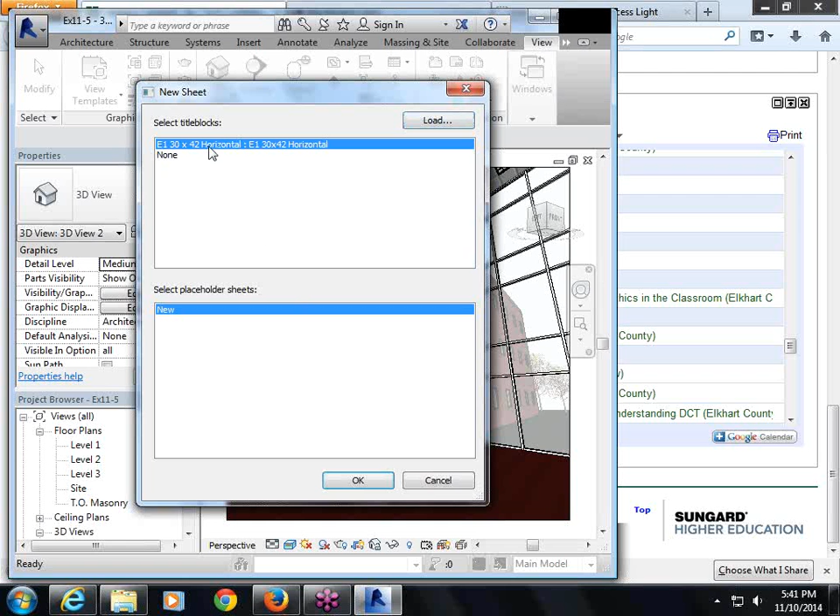So anyway, we will be selecting the 30 by 42. Select OK, and here's our sheet. If we zoom into these sheets and click on anything, we can change anything we want.

In this unnamed category, once we change this item here, it's going to name this sheet to this name on your project browser. So if we select, if you look on page 12.2, at the bottom there it tells you all the things you need to be putting in there.

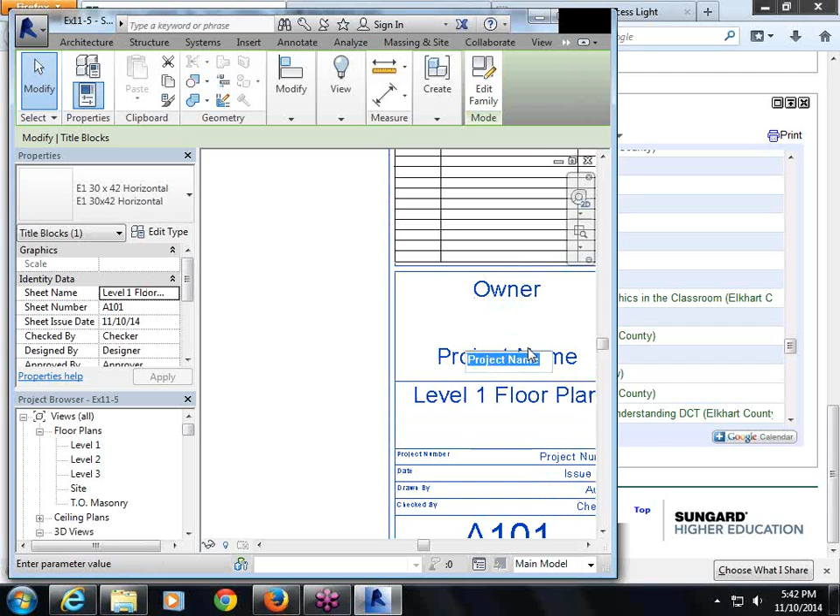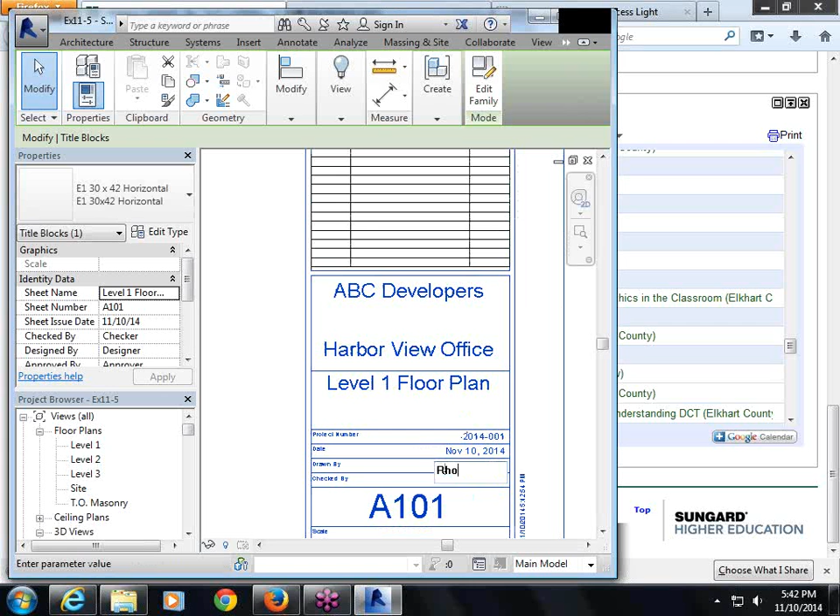So this would be Level 1 floor plan, project name, project number — I'm going to say 2014-001. Date, you can put today's date if you want. And then this should say A101.

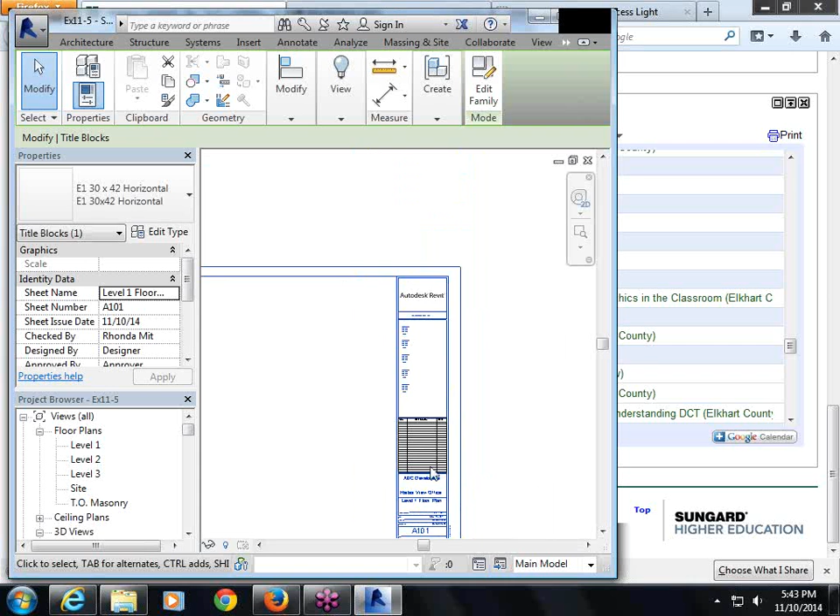Now don't worry about changing any of this stuff here at this point, but let's say if we did have a revision to make, we can always indicate that here. That's what this area is for. You can say change 1, change 2, change 3, a description of that change, and then the date of that change.

Okay, and then if we go here under our project browser, we can see now that there's a sheet called Level 1 Floor Plan.

So what we want to do is zoom out so that we can see the whole page, and we want to make sure that nothing's selected. Now this is important: do not double click on Level 1 Floor Plan to place it in there. You'll just left click once and drag it over your sheet, and then it'll give you a placement of where you want that.

So if you double click on Level 1, you'll go to the Level 1 Floor Plan instead of staying on your sheet, which is what you want to do. If you mess up, you can always go back here under Sheets, double click, make sure nothing else is selected, and then left click onto Level 1 and drag it over on your sheet.

You guys able to do that? Yes or no? Yep, yep, okay. Kristen? Yep. Were you able to? I'm trying, my computer's being a little slow with it, but I'll see if I can get it figured out. Okay, Josie, how about you? I just got home, just setting up. Okay. And Jocelyn, how about you? Are you there? Jocelyn? Jocelyn? Yes? Are you there? Okay, good. Yeah. Are you up and running? Were you able to, yeah, were you able to drag over your floor plan?

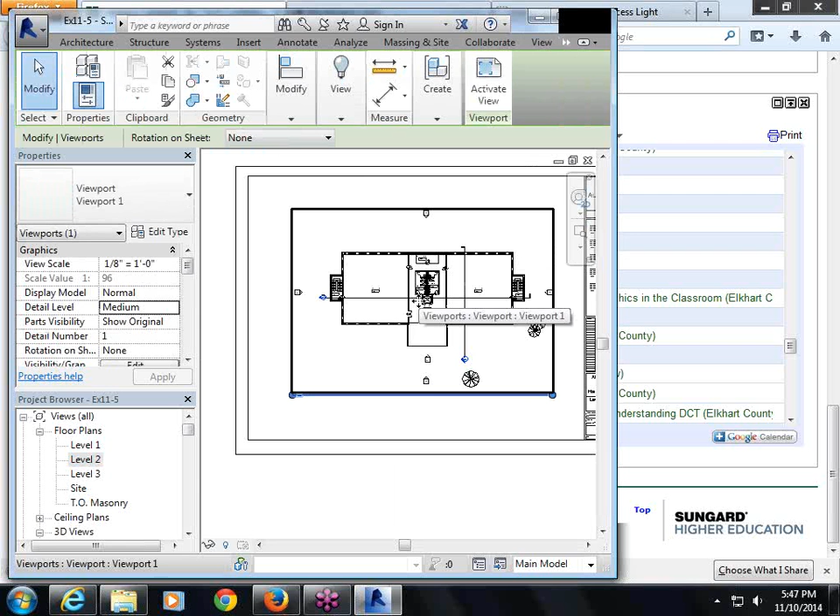Okay, so we have our whole sheet. If you look on page 12.4, they want you to do two more sheets with the two other different levels of floor plan. So what we'll do is go to View again, Sheet, pick our 30 by 42 sheet, and then we want to zoom in here and label it Level 2 Floor Plan. It should say A102, and then zoom out, and then drag our Level 2 over on the floor plan. There, we got it. Okay, we need to add another sheet.

View, Sheet, 30 by 42. Name this one Level 3 Floor Plan. Click onto my Level 3 and drag it over. And that one's in color.

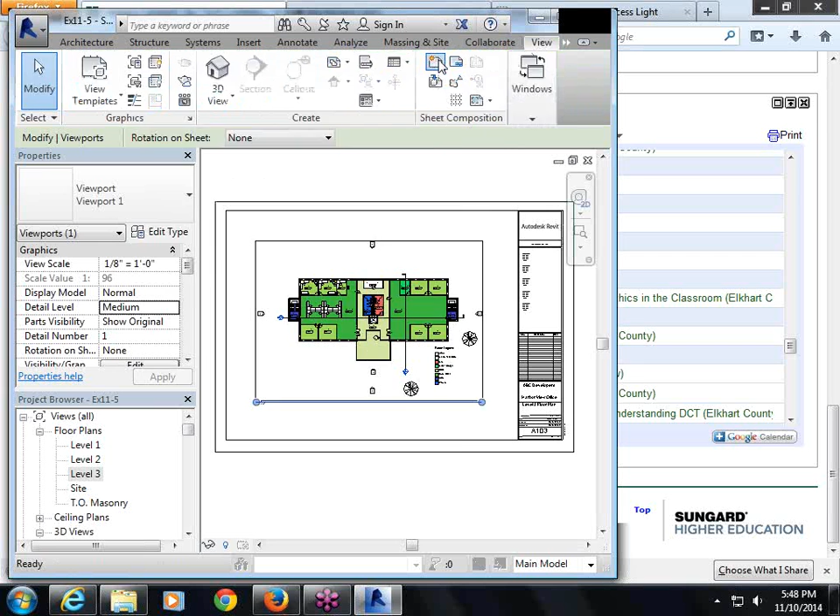Okay, step 13 on page 12.4 says next you will set up the exterior elevations on the A200 series sheets. So we need to set up another sheet, View, Sheet, 30 by 42. In this one, we will number A200, and we will name it exterior elevations.

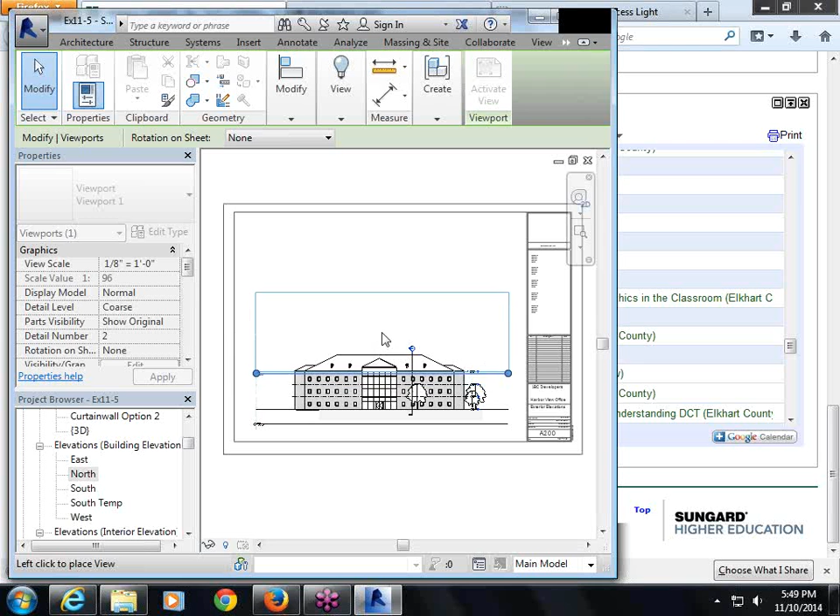Okay, then it says to place the south elevation, go here to south and put it near the lower right. And then we want the north elevation and drag it over on top. And what's nice is when you place different things, you can see those cyan colored dotted lines, and it'll show you how to exactly line them up with one another.

Okay, now one of the things that happens in these elevations is that normally you wouldn't see these trees. So what they want to show you here is how you can quickly and easily from this sheet view go in and change and turn off those trees. So if I select one of the areas, right-click, and go to Activate View, now this view is active. And then what I want to do is change the viewport views here, so I want to go down here to planting and turn that off. Okay, but in order to get off of that view, I right-click again and deactivate that view. Okay, now I have that live elevation still on my sheet, but now the plants are turned off.

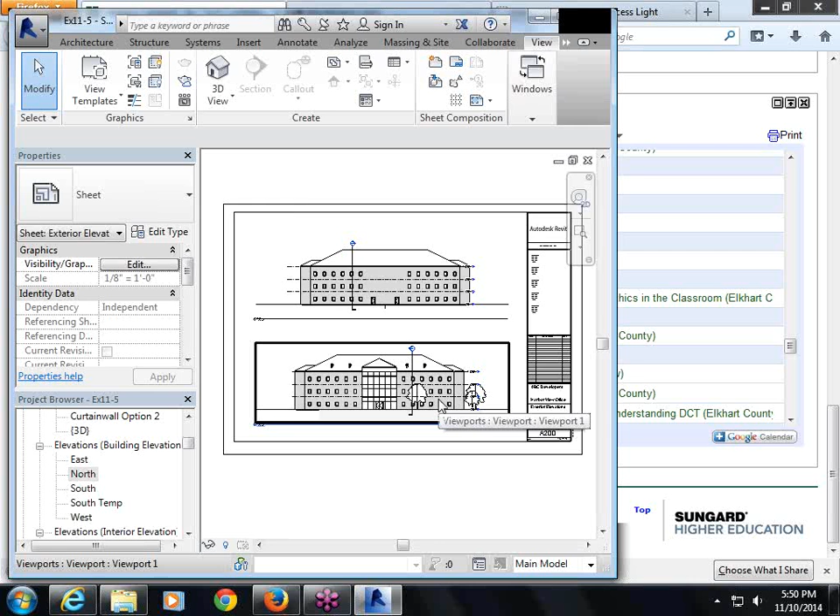So I have to do the same thing with this south view. Activate view, type VV, go down here to plants, turn it off, and then right-click again and deactivate view. And then here I have both of those views now without the plants.

Rhonda, I have a question. Mm-hmm. When I went to drag over my elevations, they were too long, like the box that they came in was too long for the sheet. Do you know what I'm saying? Mm-hmm. Is the box longer than what's showing on mine? Yeah, it's longer. Okay, you can go to your south view, double click on it, and I think you can click on, where's that? Crop view. I think it's because of my site, my topography is too long, or something. Where's that annotation? Far clipping. Cancel. There should be a box that you can turn on and off that surrounds it.

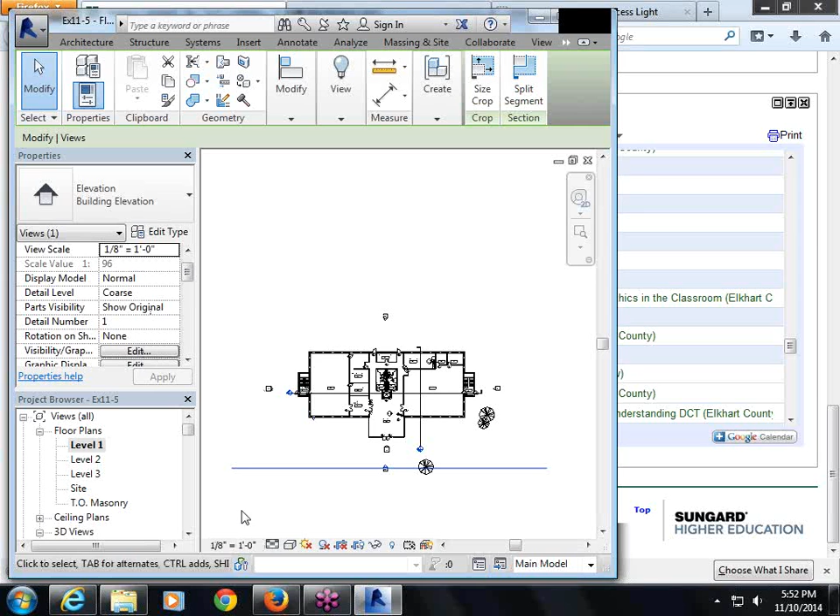Yeah, you can't really make that smaller. Is there a way I can hide my ground site we made? Maybe that's because it's visible. Yeah, you can type VV, let's see here. Yeah, there's a selection here for site. You can turn it off and see if that helps.

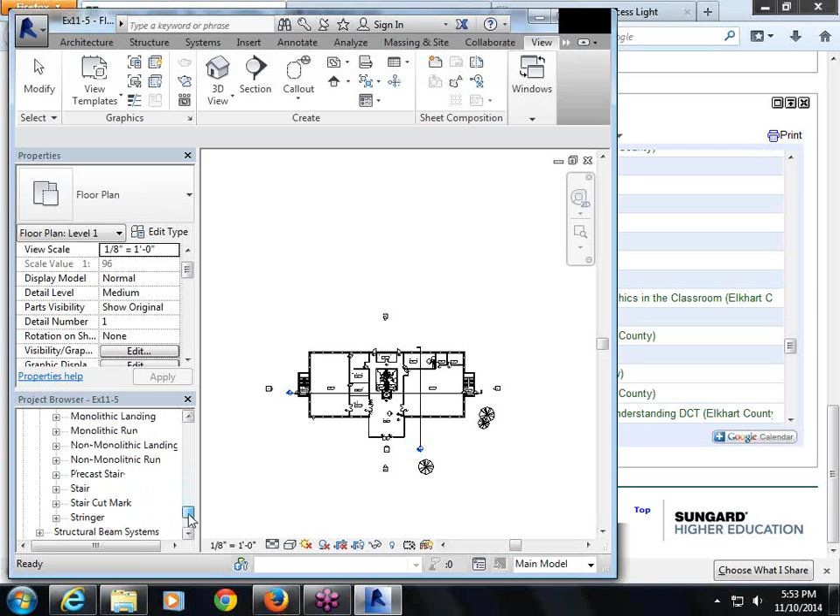All right, so I need to go to my exterior elevations. I've got that done, but I need to add the east and west elevations. So I go up here and find my sheet, I need to add another sheet, and I'm going to name this exterior elevations.

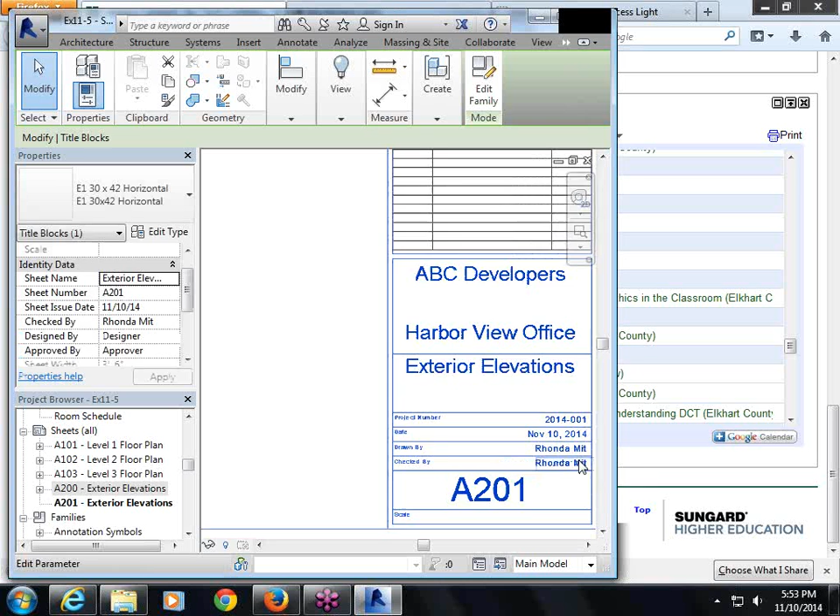And then I'm going to click on that and go to my east and west elevations. Now, what they have here, if you can see on page 12.7, they have an additional section that they want you to do.

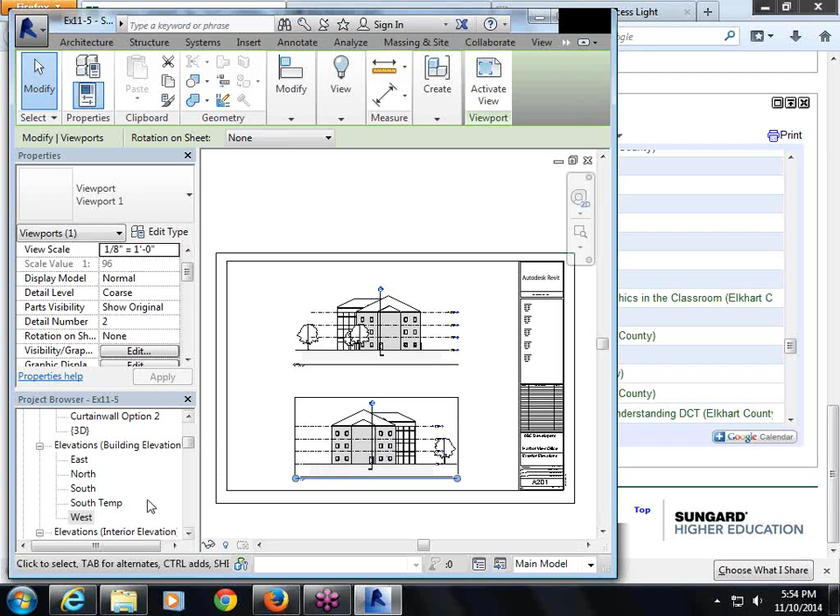Oh, it should be section, not elevation, right? Am I getting confused? Okay, so we just did elevations, exterior elevations, east and west. Yeah, I got east and west done.

Now we are on the bottom of page 12.6. It says switch to level 1, and we need to create, oh, by the way, it has you zoom in here. You can see that these elevations now have markers with the corresponding page it would go to, so the south elevation is on page A200. If I zoom in here to these east and west exterior elevations, that's on page A201.

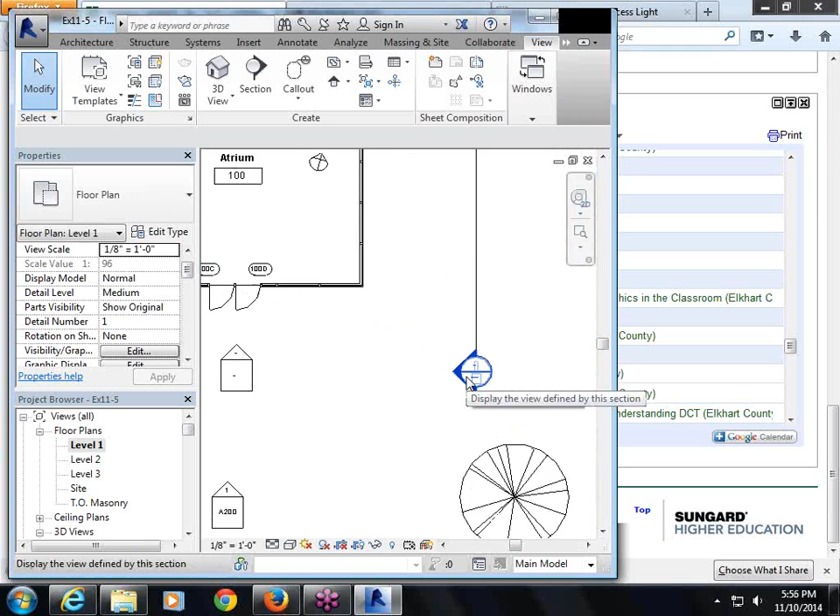So that's pretty cool, it automatically updates all that stuff for you. Now we need to create a sheet numbered A300 and title it Building Sections. So we go over under View, Sheet, pick our 30 by 42 sheet, and we need to list this as A300 and name it Building Sections.

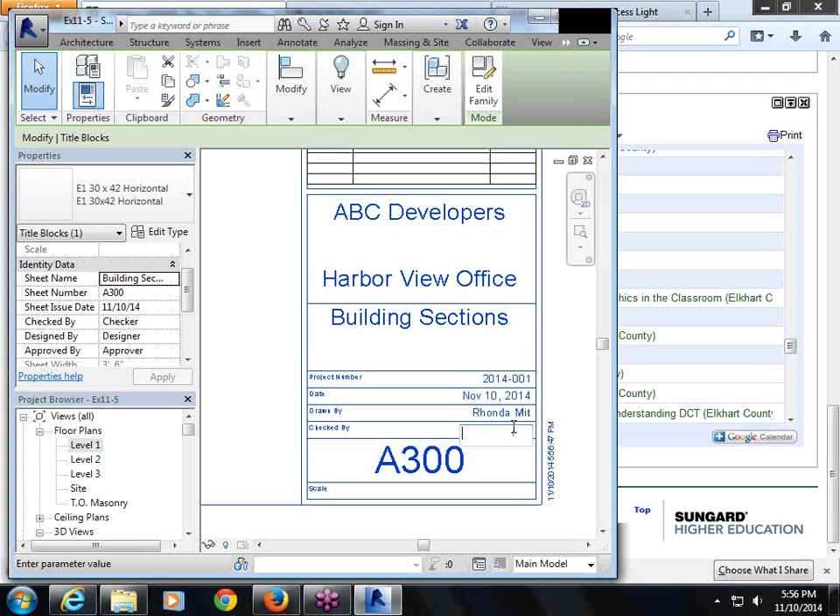Okay, now it says add a cross-section and plan view through the atrium area first. So if we go to level 1, we need to add, let's see here, View, Section, and we want to create one that's through the atrium area. And if we go down here now, that's our section.

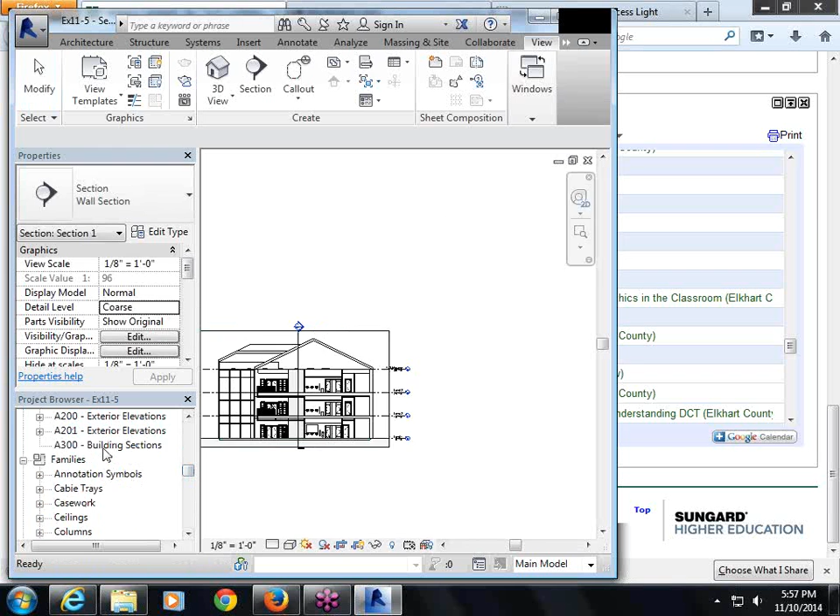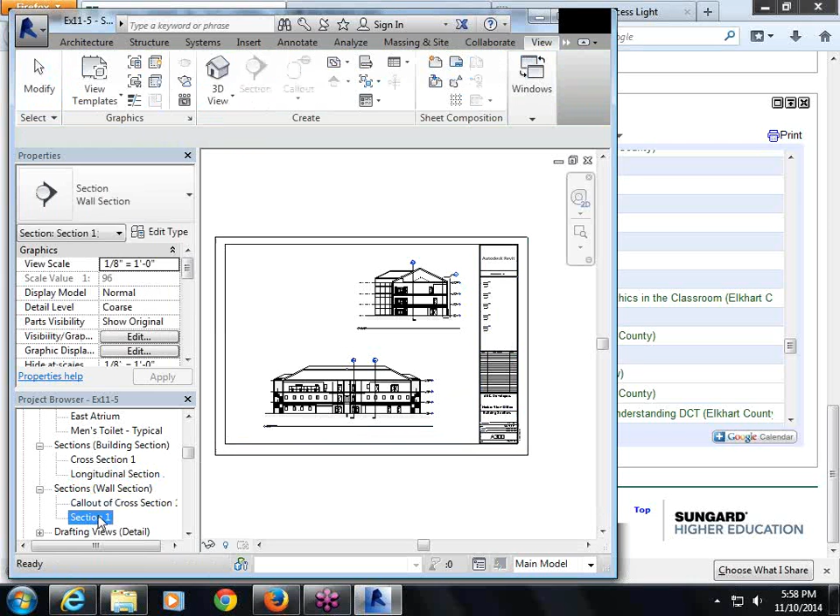So we need that, that's our other section. Now we can set up our page, go back to our A300 building sections page in our project browser, and now we can go through building sections and drag them over, and line it up. So there we have our 2 sections. If we go to level 1 again, we can zoom in here and see that our section view is labeled with the right page that it's on.

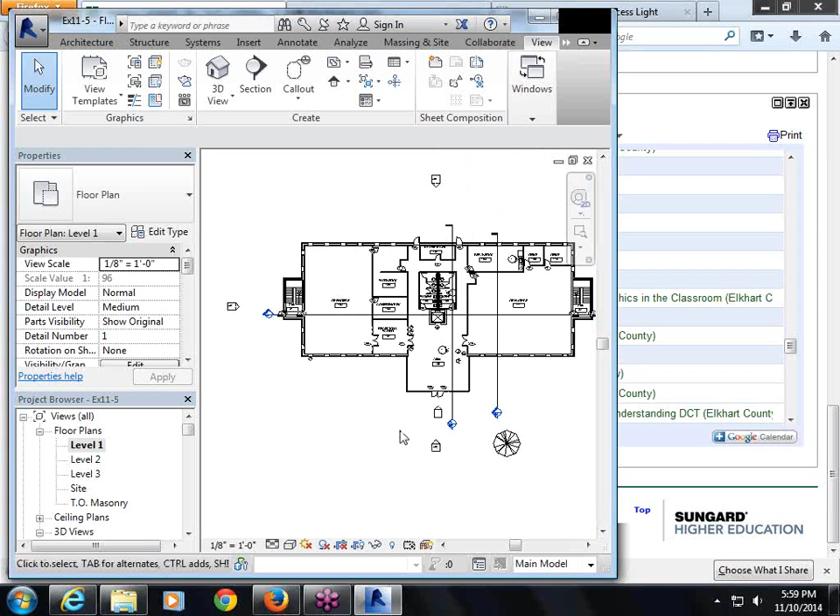Okay, so now on page 12.8, it says to set up the remaining sheets. We have 3 sheets that have each level of the reflected ceiling plan. We have wall sections, interior elevations, details, and schedules. So we can go ahead and do that. I'm going to set up page A111.

And go to my ceiling plans, level 1, drag it over. And then create another sheet, label it level 2 reflected ceiling plan. Drag over my level 2 ceiling plan.

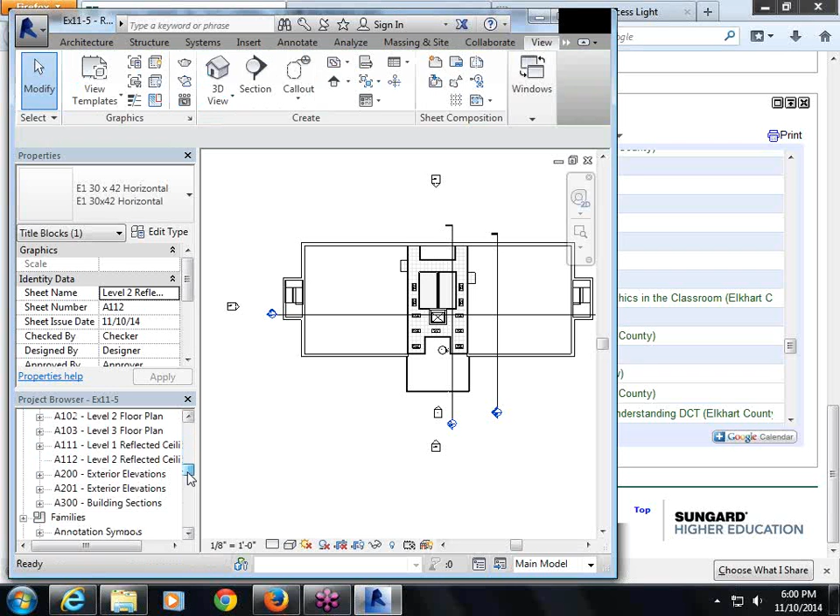Oh shoot, this is what you do by mistake. I gotta hit my sheet again and then drag it over. Oop, not that one. Ceiling plan, drag it over. There we go.

And then create another sheet and label this level 3 reflected ceiling plan. And drag over my level 3 ceiling plan. There.

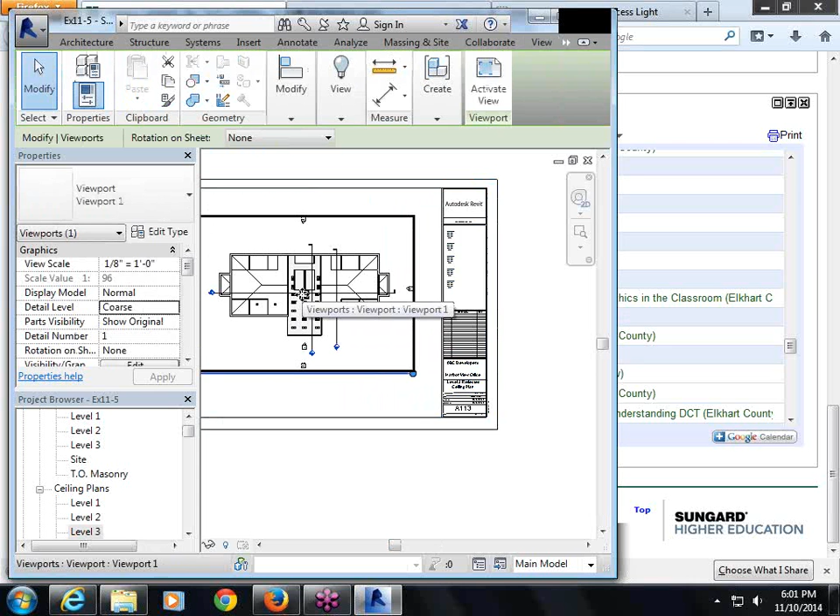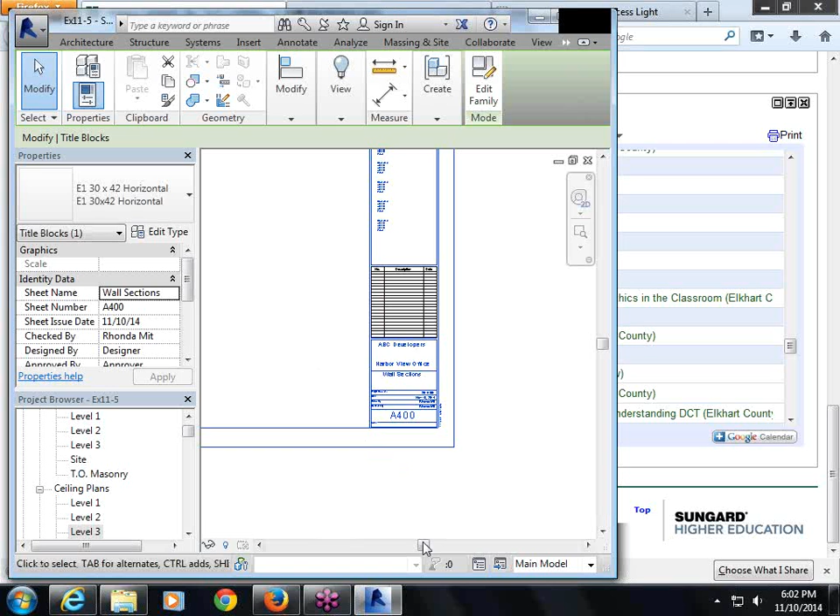Okay, now I create another sheet and label this A400, wall sections. And bring over my wall sections. This doesn't fit.

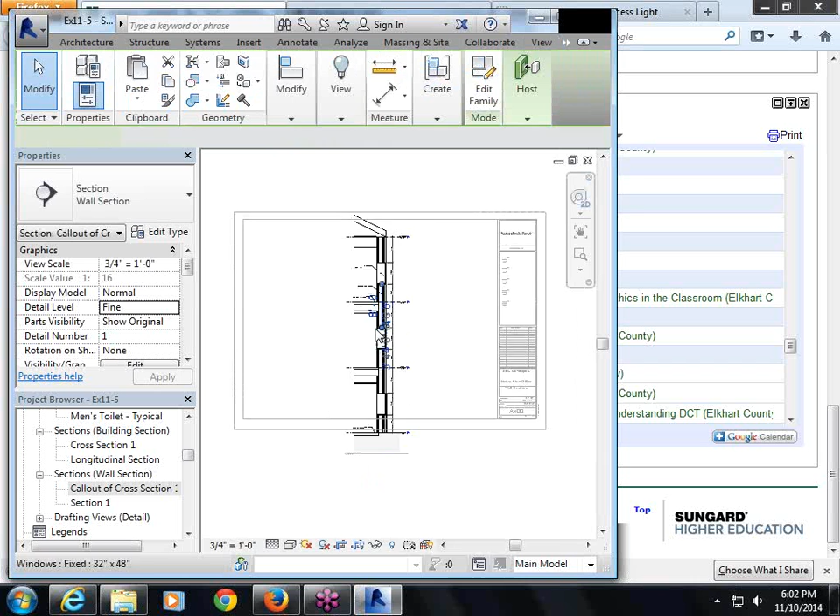So what I'm going to do is go in here, okay, my view is active. I'm going to make this a smaller scale, 1/2 inch equals 1 foot. There, now it should fit. Deactivate my view. Now it should fit. Wall section.

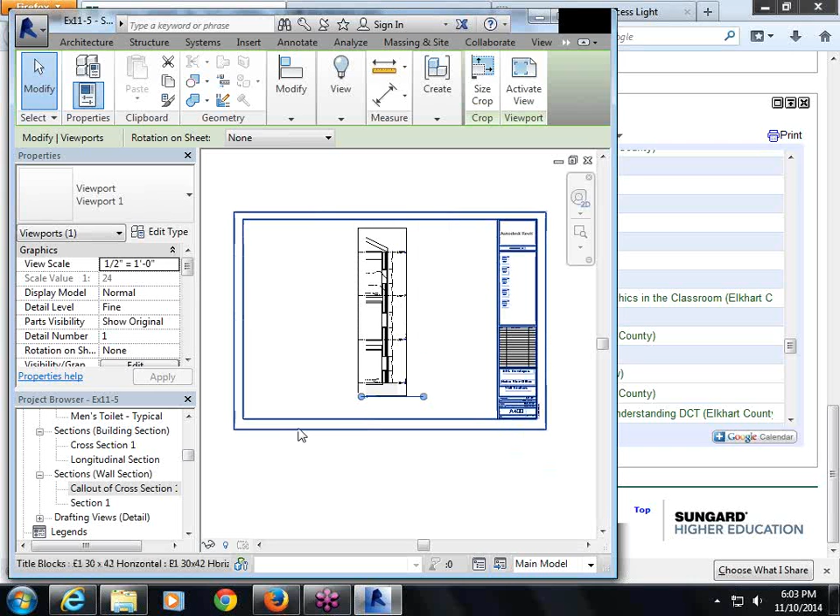Now interior elevations, so we go to View, Sheet, we label this one A500, interior elevations. Let's see if we have some interior elevations here. Yeah, these here. And line them up.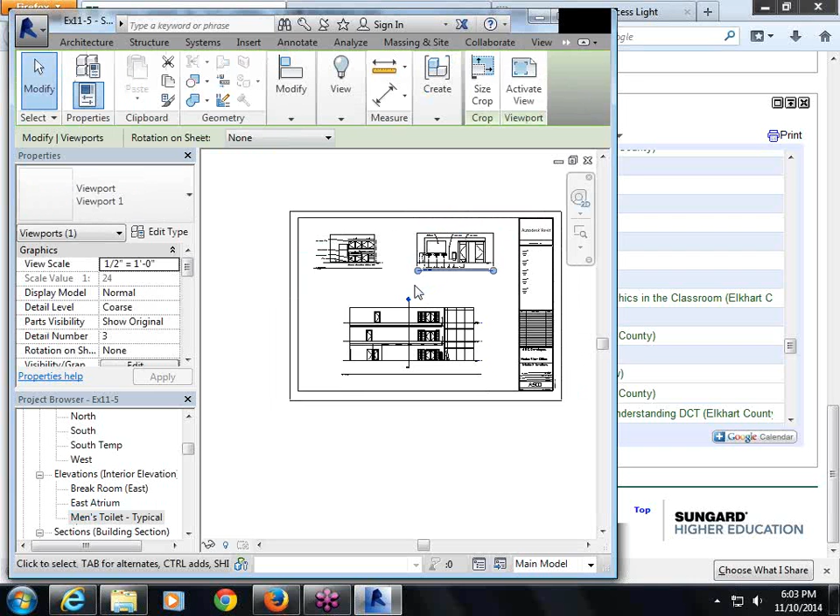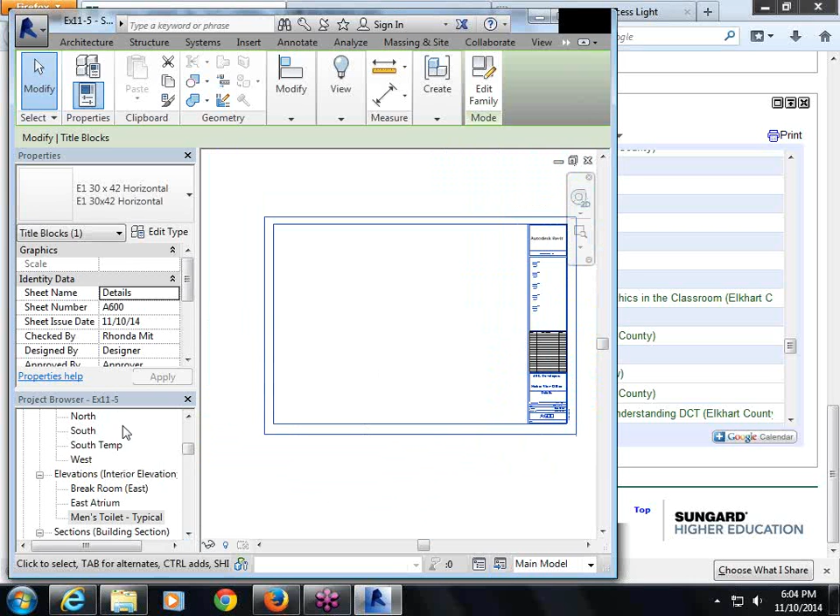Create another sheet, label this detail A600. And drag over all of my details. Okay, where are they? Sections, drafting views, there we go. Drag all these over.

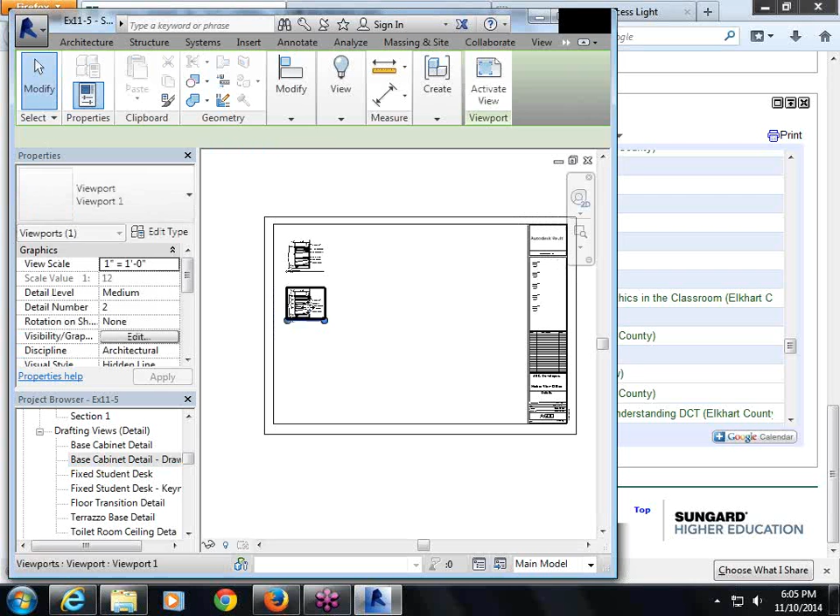I think setting up sheets is so way easier on Revit than it is in Chief Architect. Do you guys agree? Yeah. Yeah. Yeah, I agree. Yeah.

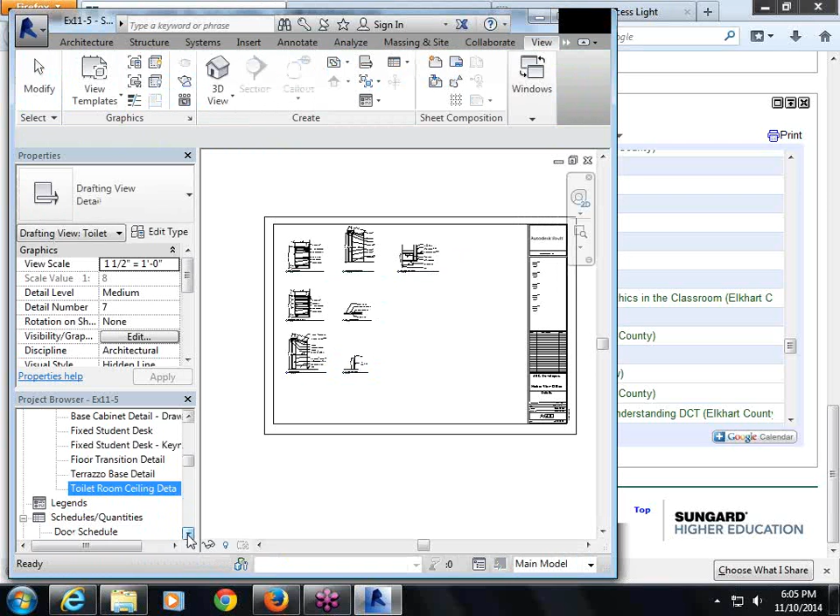So here's all of our details, and you can rearrange them, make them look a little bit better.

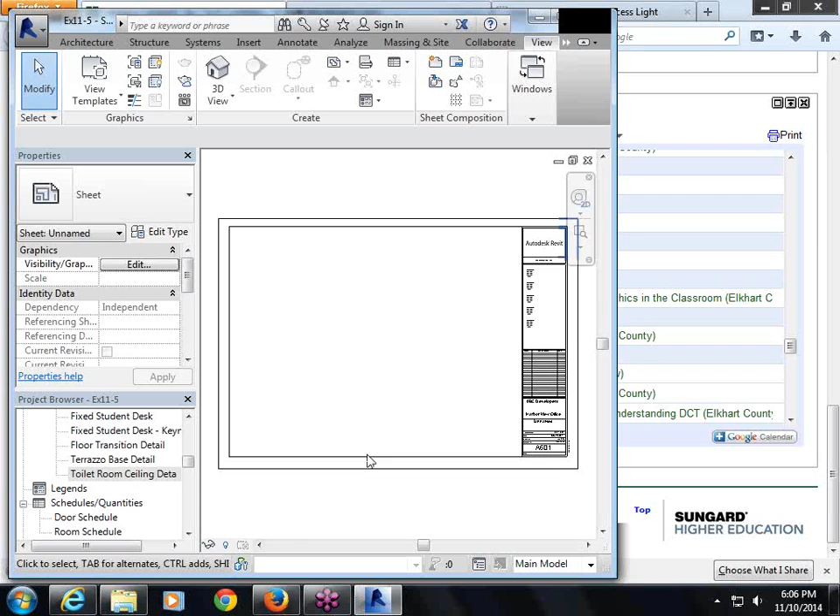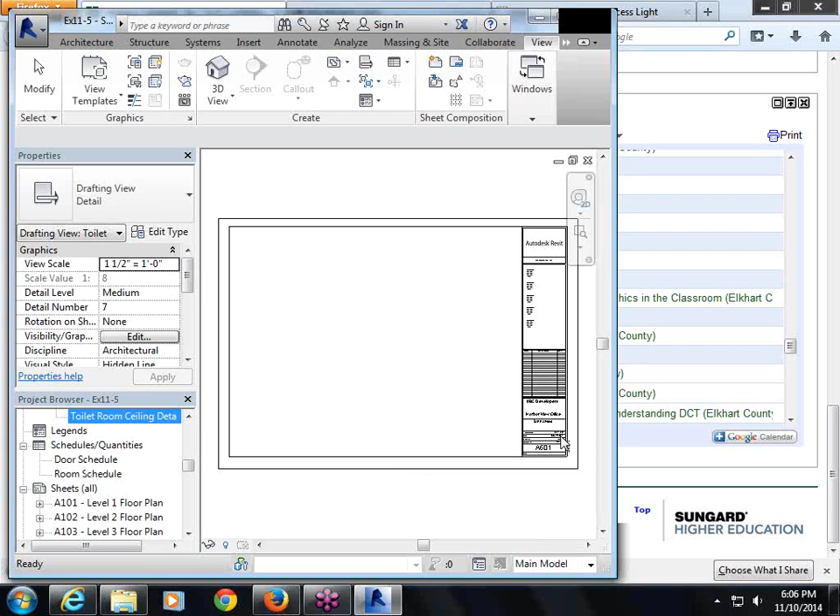Okay, so we have our detail sheet, and now we go to schedules. Schedules are something that depends on where you want to put them. Sometimes they're not on their own sheet, sometimes they might be with your floor plan, especially if you have a cabinet schedule that usually goes with your half-inch or quarter-inch scale floor plan of just that room, labeling each cabinet. So it kind of depends. Sometimes they're not always on their own sheet. So I'm going to label this sheet.

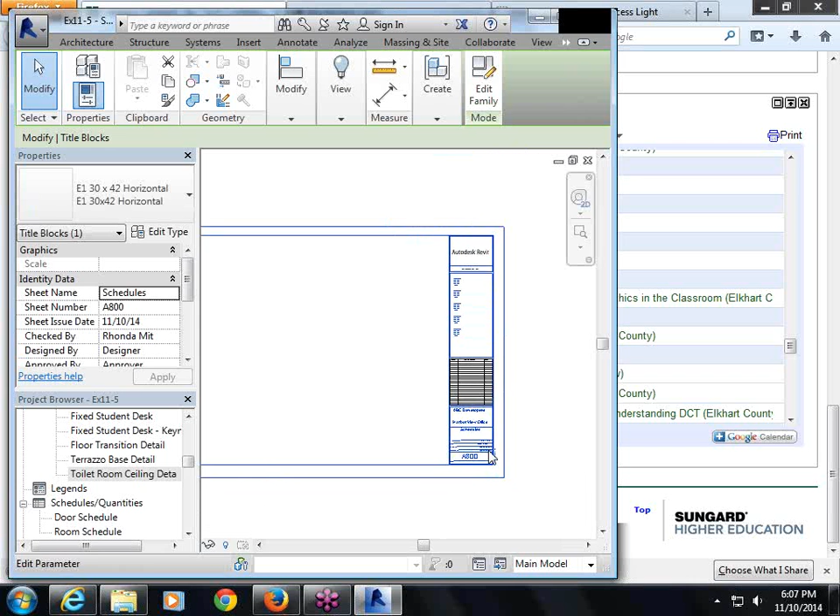A800, Schedules. And drag them over. Oh, they don't have the cyan thing for placing them. So those are our schedules.

Okay, so how do you know if you've got everything in there that you need or not? On page 12.9 it discusses this. It says, on a large project with hundreds of views, how do I know for sure I have placed every view on a sheet? Answer: Revit has a feature called Browser Organization that can hide all the views that have been placed on a sheet. We'll try this next, so take a general look at the project browser to see how many views are listed.

So if we go up and down in this project browser, we can see there's a lot of different views shown here. What we want to do is select Views All in the project browser. Now in our Properties palette, we can go down and say, okay, I want to see all the views that are not currently on a sheet. So if I go to that, now it's showing me. So all my 3D views currently are not on the sheet, which we'll need to print off as well.

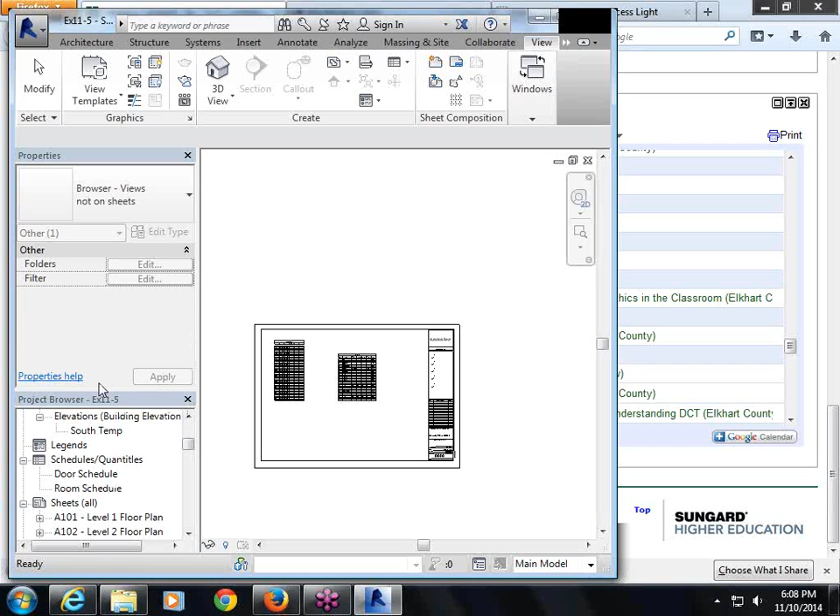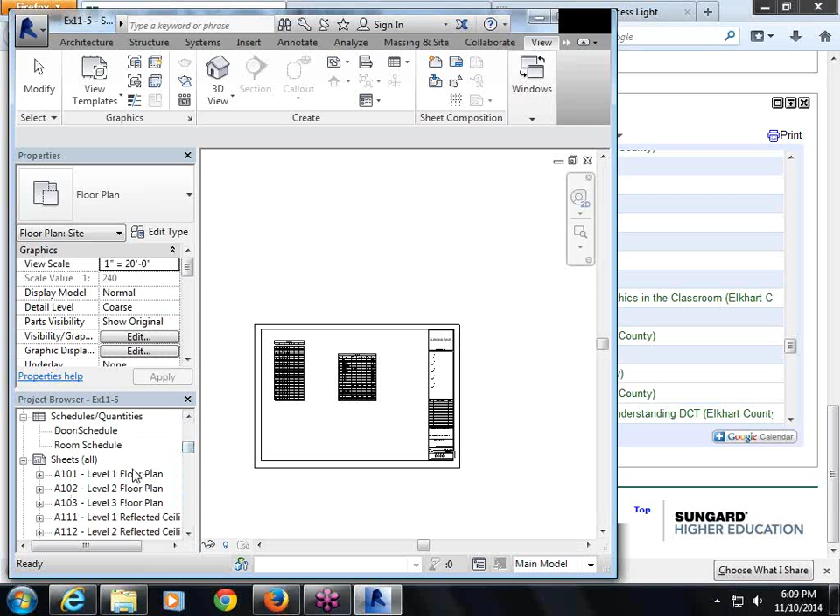So, Rhonda, yes? Why would it have door and room schedule not on a sheet if you just put it on a sheet? Maybe I need to get out of the sheet. Because a lot of those are on sheets. Maybe it's because I haven't been closing out of these sheets, I'm just bringing up another one on top of it. How do you close? Up in the corner, you must have to close out of each sheet, huh? You don't close out of it, you're just going back and forth to each one.

So if I click out of my sheet and then go back here to views, I'm going to see if it'll still show that, and it still does. So I don't know if they're just listing different views and it's not calculating in their schedules and quantities and stuff, which I'm thinking might be it, why that's still shown. Technically it should not be shown there, but I'm thinking it's just figuring in different views, elevations, and floor plans and stuff.

So, okay, let's go back to all on my views, and here's all my views again as they were. Okay, so it'll show you that except for the schedules and stuff, so that will be separate. But as far as all of our elevations, section views, drafting details, elevations, all of that - when I go up here and turn it on to not on sheets, it collapses and just shows me the ones that are not currently on a sheet, except for my schedules. So anyway, does that make sense?

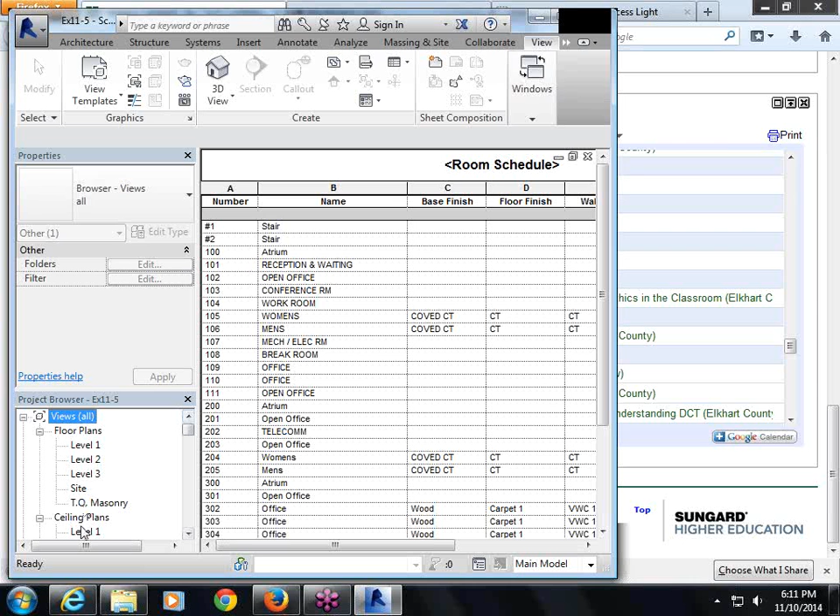Okay, all right. Now we need to create a sheet. I'm going to go back and turn this back on to all, come up here so I can see them. I'm going to create another sheet and label it A900, and name it Atrium Options.

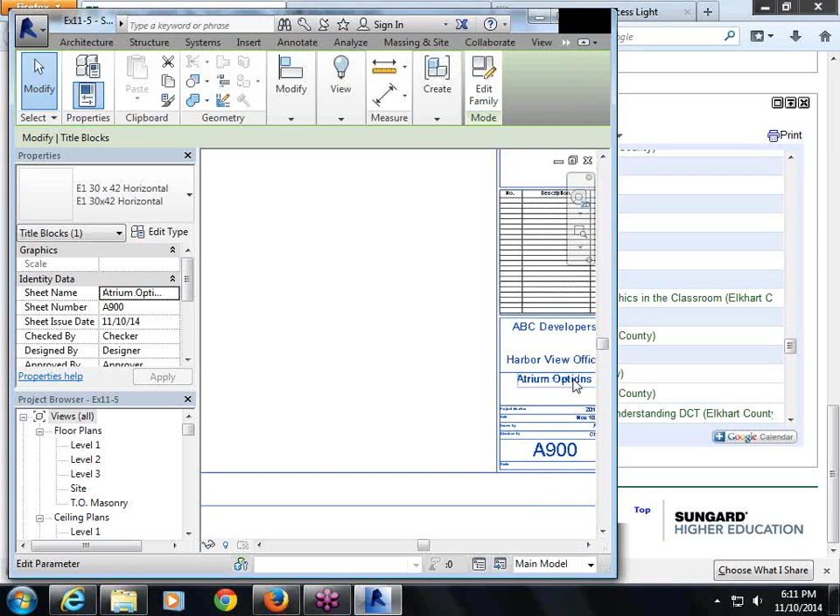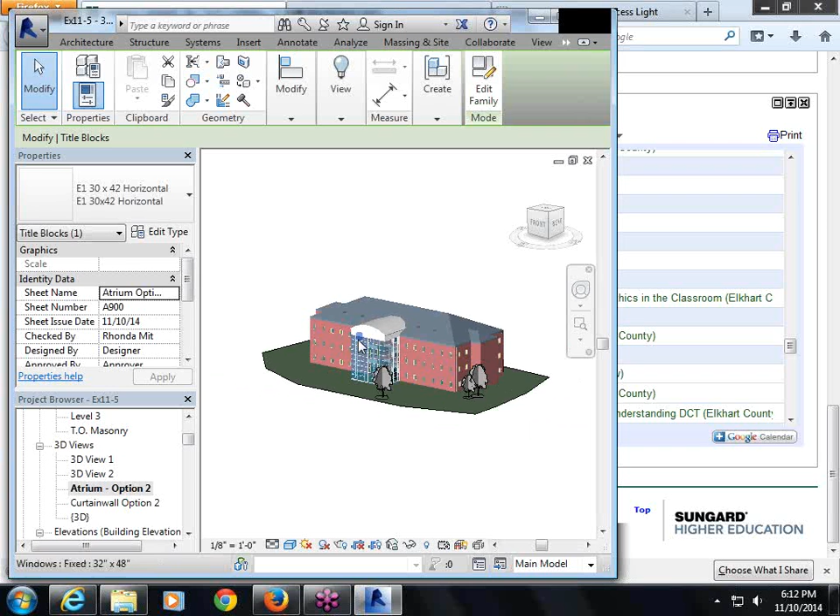Now I know most of you had problems, including myself, with these atrium options and getting them both that roof to connect with the curved roof. So hopefully we can get a view saved that doesn't show that. But anyway, I'm going to go back to my sheet.

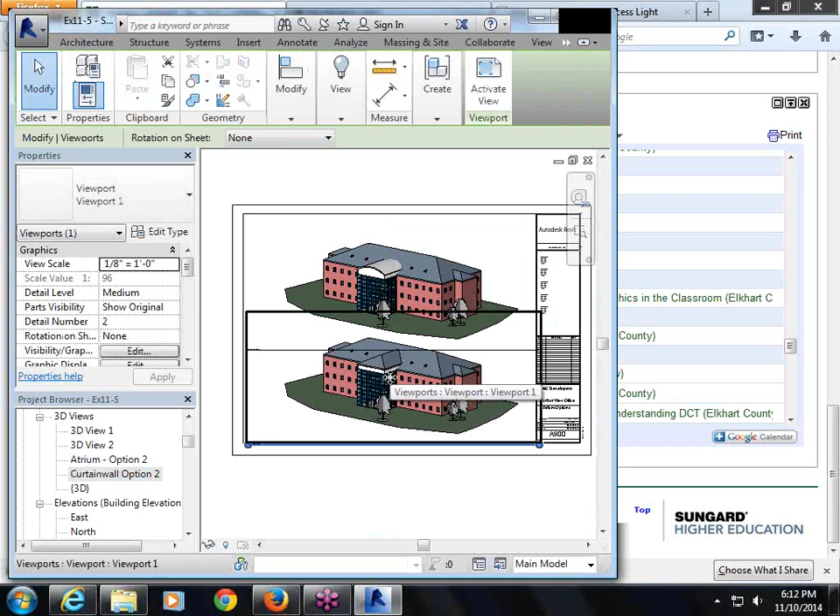And drag over those two options. Now keep in mind too that you can always move them up and down with your arrow keys, to make them fit well. There we go. Okay, so you may want to get a view that doesn't show that as well, or just select the one option that was completed.

Okay, so it says here to make sure that each of these views are set to 1/8 inch equals 1 foot, on page 1210, and they are. And deactivate view, switch to this one. And yes, it's 1/8 inch equals 1 foot.

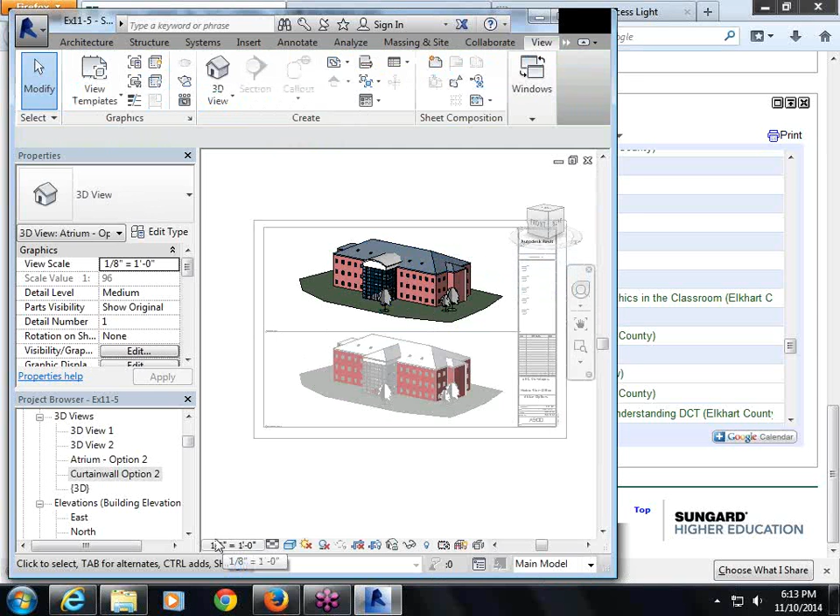Okay, I'm going to deactivate that view. So now I'm back in my sheet.

At this point, you should have all of these sheets that are listed here: A101, 102, 103, 111, 112, 113, 200, 201, 300, 400, 500, 600, 800, and 900.

Now we're on page 1212, and we're going to be creating a sheet list view to put on our title block page to show what is on what sheet. So we want to go to View, Create, and go to Schedule Sheet List, Schedules dropdown, Sheet List.

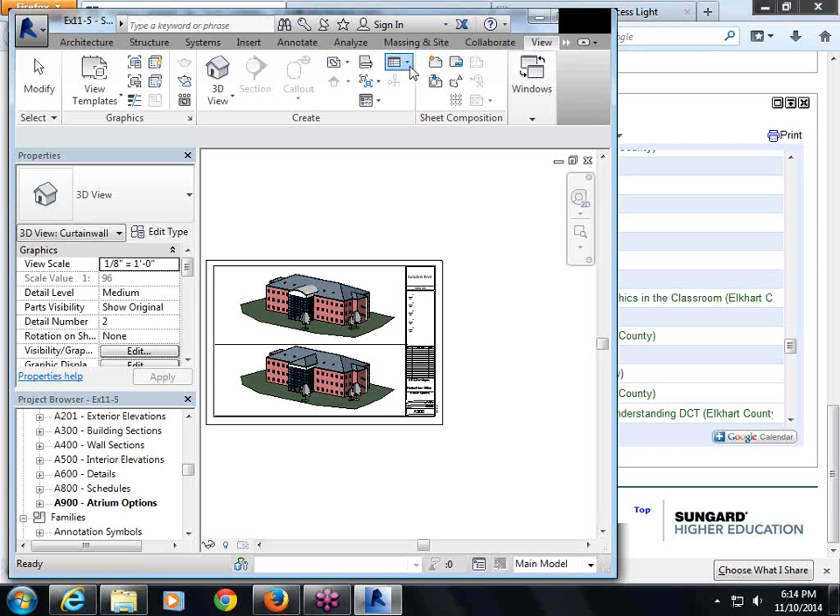We want to create a sheet list that shows what sheets are on what page. First we want to show sheet number and then sheet name, and then click OK.

Now here you can see a list of all of our sheets and the sheet names. If we click on one of these here, we can make them wider if we need to, so we can get ceiling plan shown under the reflected ceiling plans.

It's currently listed by sheet number, and they're all in order—or no, we need to redo that. So we want to go here to sorting, grouping, edit, and sort by sheet number, ascending, and now it's renumbered them in order.

Now we're on page 1214, setting up a title sheet. It says now you create a title sheet to place your sheet index on. So we want to go back to View again, Sheet, pick our sheet.

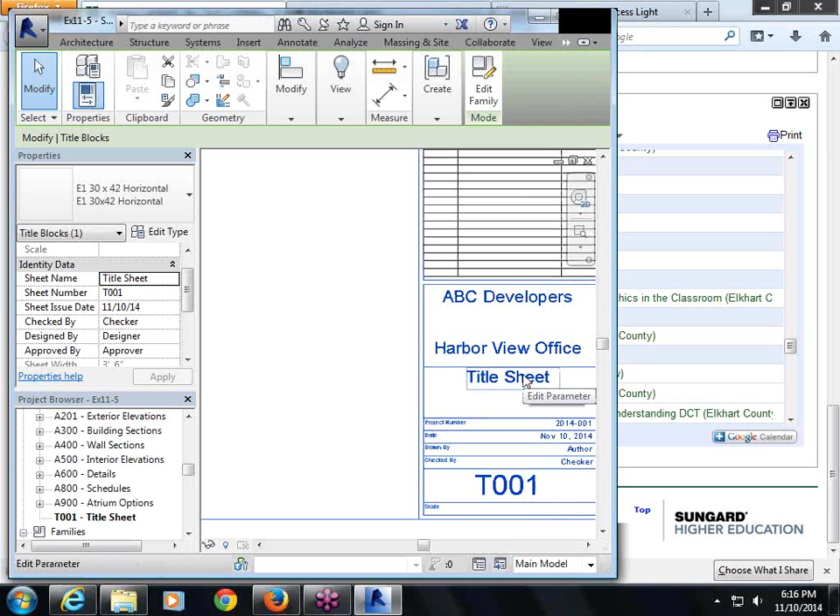Now we can see if we can find our sheet list. When we do, under Schedules, drag it over there. Looks kind of tiny.

And then one of our images that we saved for the front of our building, we can insert. So I'm going to go Insert, Picture. I believe this is it—that's our front view.

Of course, it'd be nice to get a really nice, long view on this image.

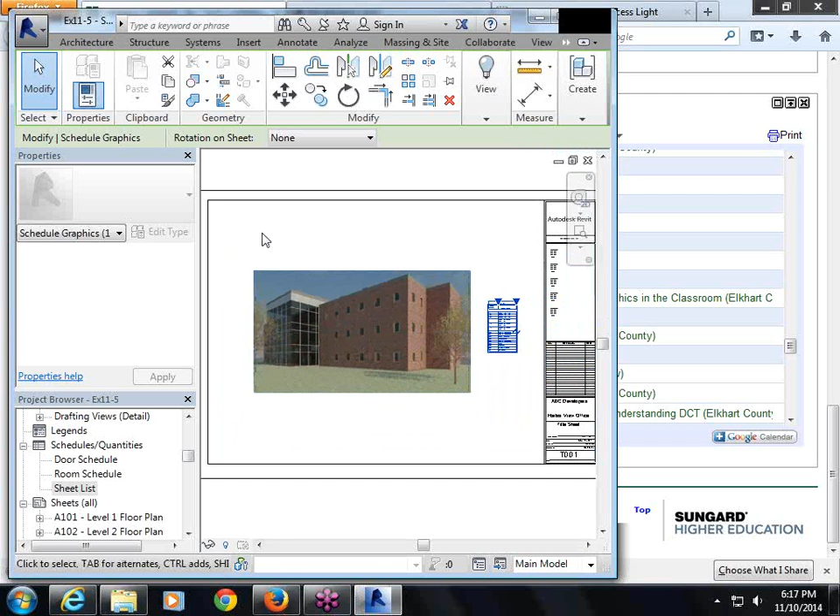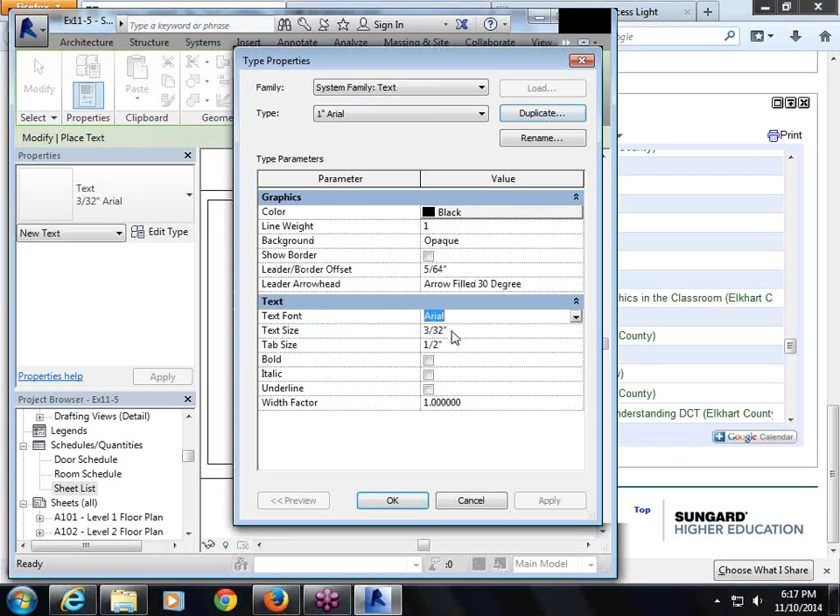Now we need to label it New Office Building. So we go to Annotate, Text. We need to create a new text that is 1 inch high. So we go to Edit Type, Duplicate, 1 inch Arial, and change the text size to 1 inch.

Now I can label my text New Office Building. So there's my title page.

It'd be also good to create different sheets and label them for your project, what all you need. We'll also have other sheets that show your other images that you should have saved up to this point.

On page 1215, it talks about if you have a lot of different images in your project, you can manage them. If you go to Insert, Manage Images, all of your selected images should show up here, and you can manage those there.

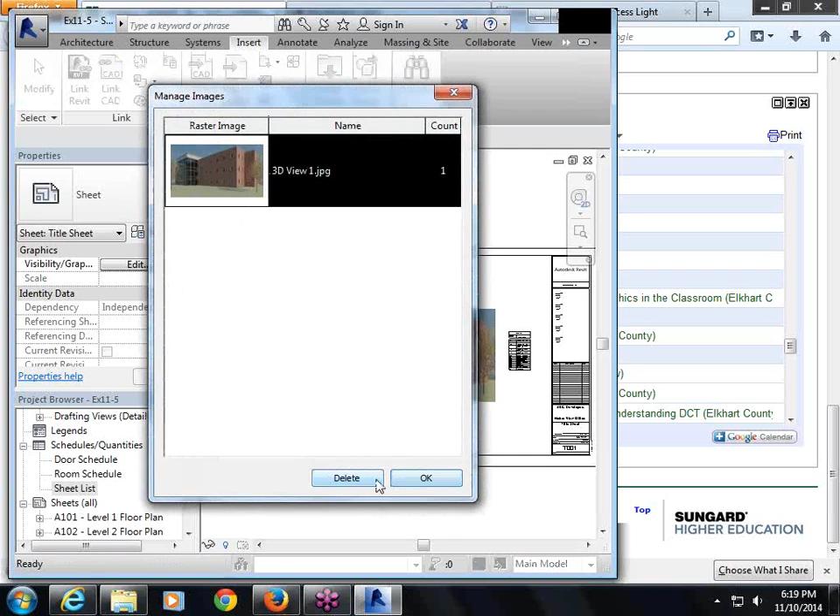All right, printing a set of drawings. We're on page 1216. We can go to your application menu, the big R, and go down to print. On the print range area, you want to go selected view sheets and then select to choose.

It has all these different views that we've done so far. So what we want to do is narrow this down so that we only show sheets—we deselect views so that now just our sheets show up.

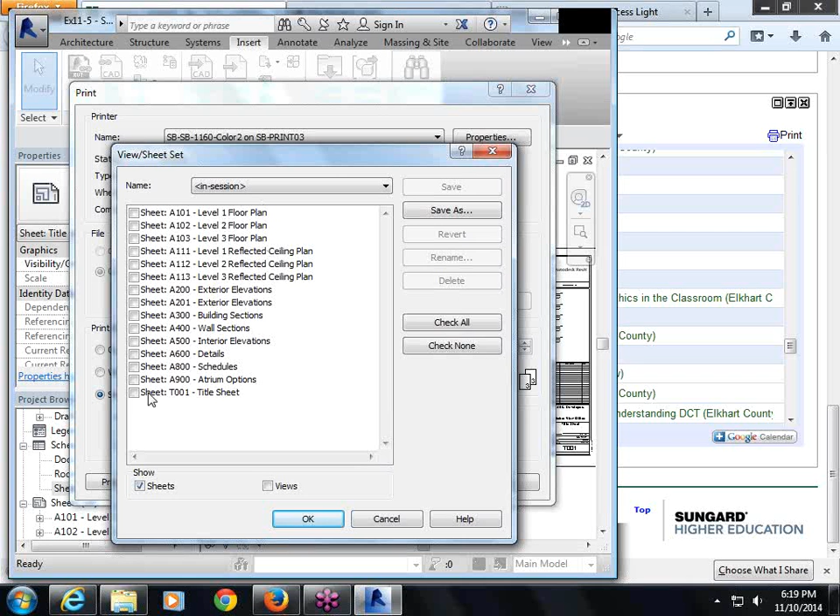Instead of checking each one individually, I can just say check all and say OK. I don't want to save these—I don't.

Make sure that you print on the correct printer. Go into properties—always check the properties before you print off. And select 11 by 17.

You can see here that it's shown in black and white, even though I chose color. I'm thinking some of these are labeled wrong. Let's go back and cancel this out. I'm going to choose the black and white, and see, it allows you to select color.

So all these printers in the lab are mislabeled, I think—if you select the black and white, the color will show up. So I want to select my 11 by 17 page, select landscape, say OK, and then it should be set up. I'm not going to print these off, but if you were to come in and print these off, it should work.

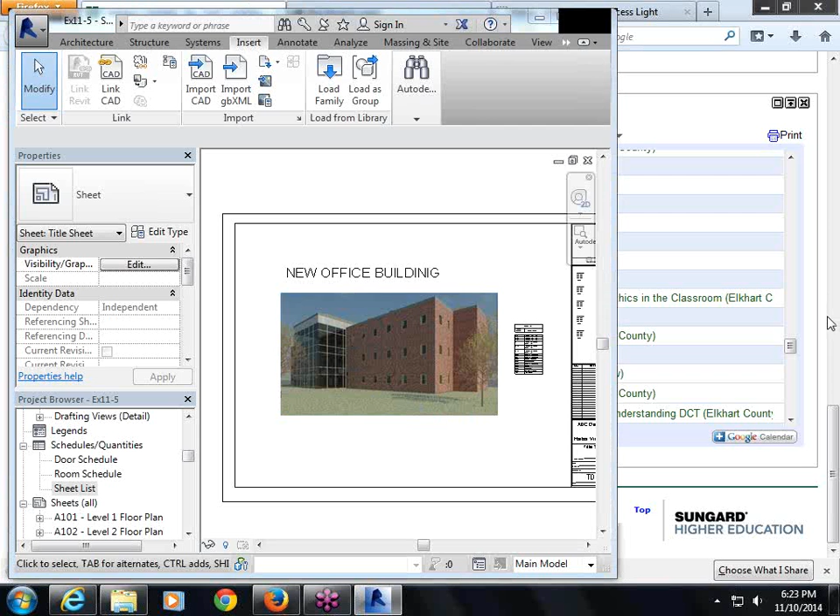We can do that. Are there any questions at this point? I have a question. Do you think you can switch back to your A400 wall sections sheet so I can see that really quickly?

What I did, okay, I had to do it was the wrong scale. I clicked on it and activated the view, and I made sure that I changed the scale to 1/2 inch equals 1 foot.

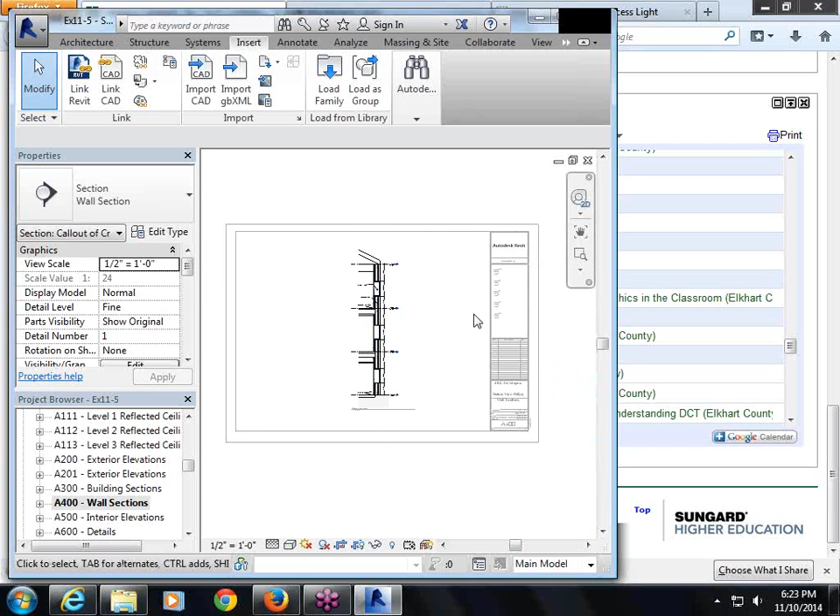That's to fit, otherwise it's too long. You can actually do it the other way if you wanted to, show it lengthwise, and just have the sheet. Even though your sheet's showing lengthwise or landscape, you can print it off the opposite direction and it would fit your page better. So either way would be fine.

Okay, thank you. Uh-huh.

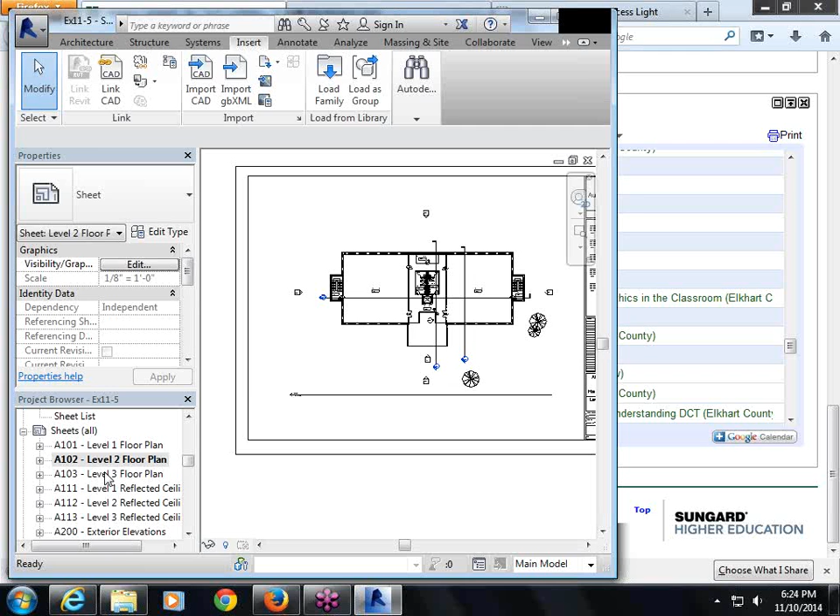So I'll go back through each of these sheets. This is your floor plan, Level 2 floor plan, Level 3, reflected ceiling plan 1, 2, 3, exterior elevations, building sections, wall section, interior elevations, details, schedules, atrium options, and title sheet.

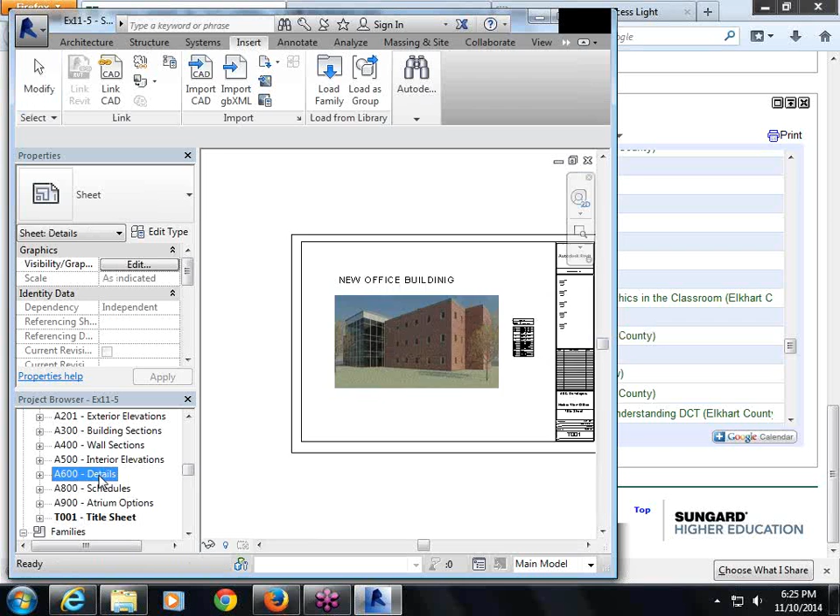Okay, are there any questions you guys have? Your detail section, that drain wasn't in there, was it? Oh, you're right. Where is the drain? Is that it? Nope, it's not. It's a long.

Is it listed somewhere else? I think it should be in that section... Should be listed as a drain. It's not in there, you're right, so I'll need to add that. Good catch.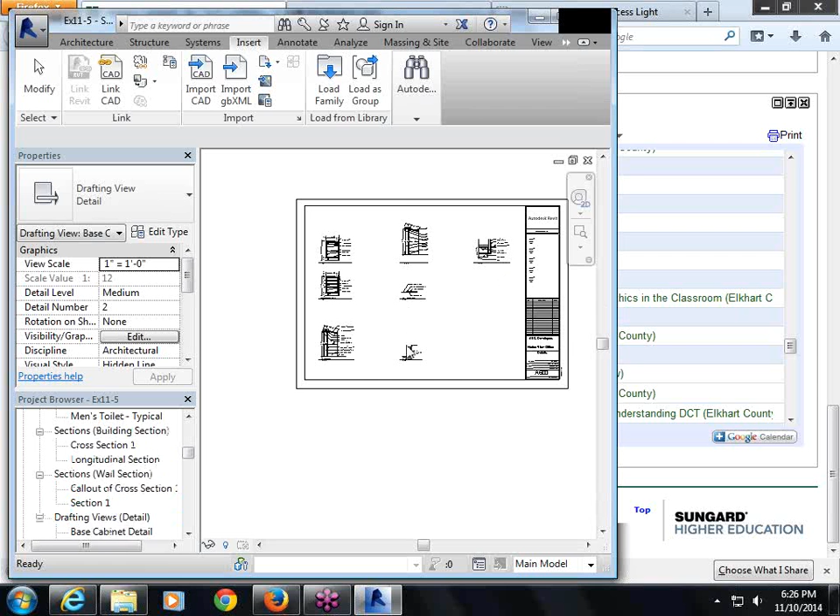Any other questions? Kim, how you doing? Yeah, I'm good. You're good? Can I make it bigger? Just want to see it bigger. Yeah, any of these, they look pretty tiny.

You can right-click on them, activate view, and while you're in there, change the scale to make it larger. Okay, that's fine, that would probably look better. Just make sure you deactivate the view again when you get out of it. Any other questions?

Josie, how you doing? I'm good. Yeah, I think it's going to be okay. Okay, Caroline?

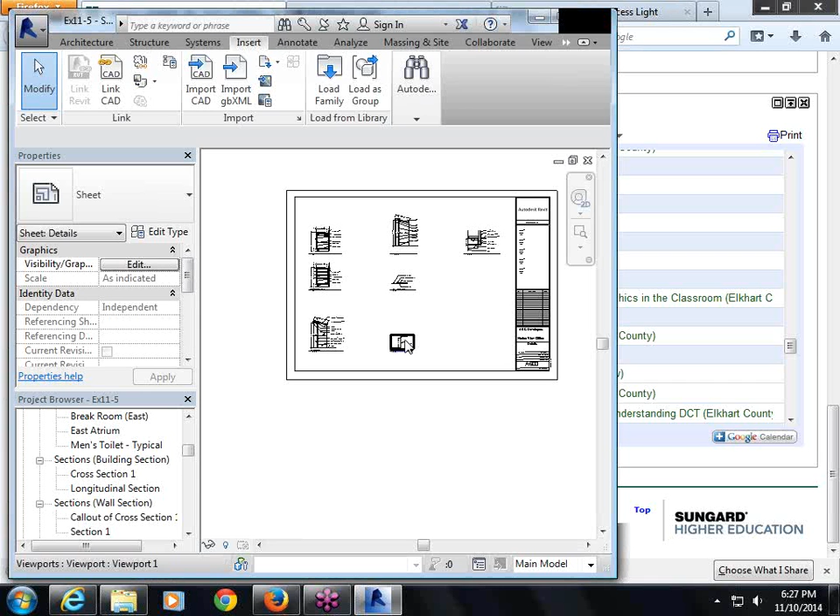Can you say again how you were going to make those detail views bigger, please? What you just told Kim: you can click on it, right-click, go to Activate View, and then your scale is down here at the bottom. You can select that and make it a larger scale.

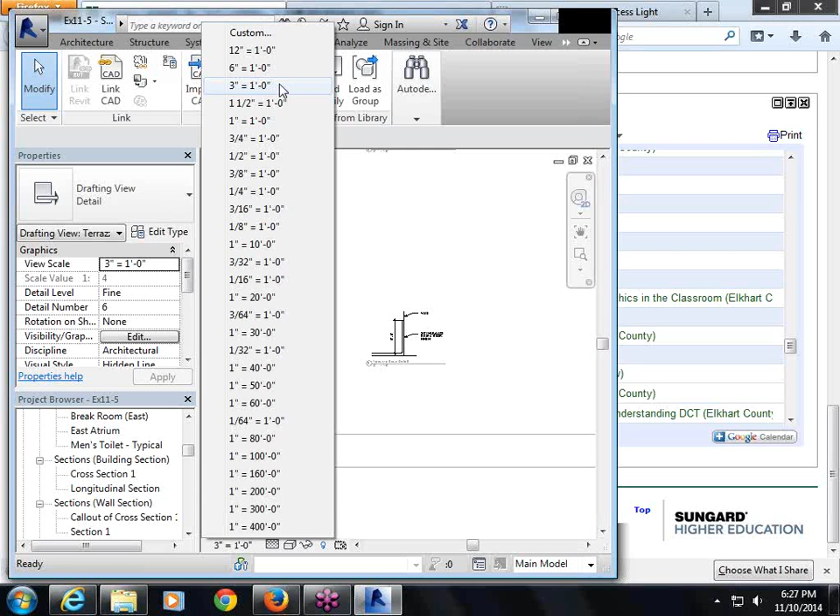What would be a good one to use? Then the next one up from that? Yeah, I don't see a 4-inch equals 1 foot. Would 6-inch work? It's bigger, that looks good. Yeah, okay, I think I'm good. Okay, you've got to make sure you deactivate the view.

Jocelyn, how you doing? Good, I'm like halfway through the last assignment. Okay, that's good. I mean, I'm working on it, so. Okay.

Yeah, Katie, how's it going? Katie? It's going well, I'm halfway through my sheet. Okay, you must have brought your laptop with you on vacation. Rhonda? I did.

Good girl. Rhonda? Uh-huh. Question, when I put the two different atrium views in there, they are really large, and it's down to 1/8 of an inch equals a foot. Is there a smaller scale, because I've got the land, the trees, everything in that view, and how to shrink that?

What's smaller than 1/8 of an inch? Is it 3/32? Yeah, I could use that one. Try that, and if not that, 1/16. That makes a big difference. It's huge.

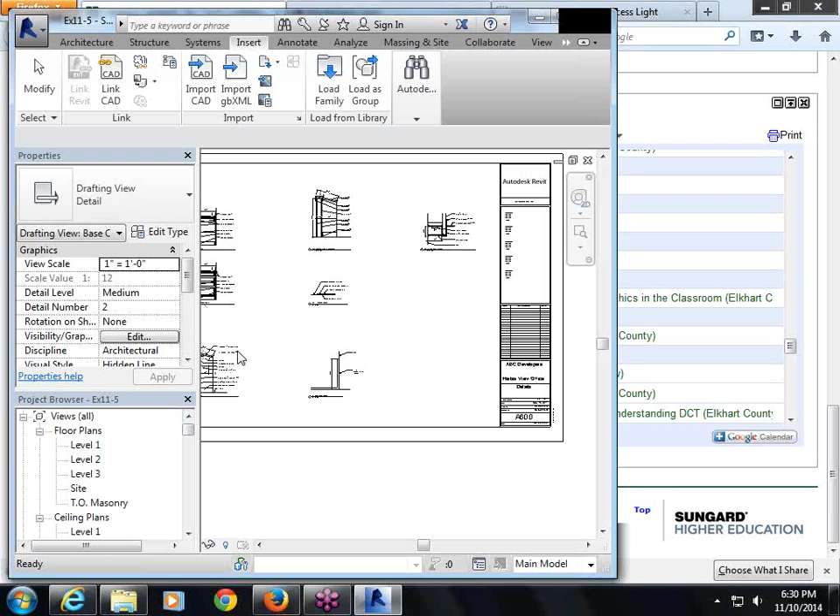I think that was lesson 2. Is that the roof line? Is that the roof lines, the different roof lines? No, it's a small office one on week 2, chapter 2.

I kind of wanted to go over with you - next week I'm going to show you those extra things that are not in this textbook that would be good for interior designers. And then the following week is Thanksgiving.

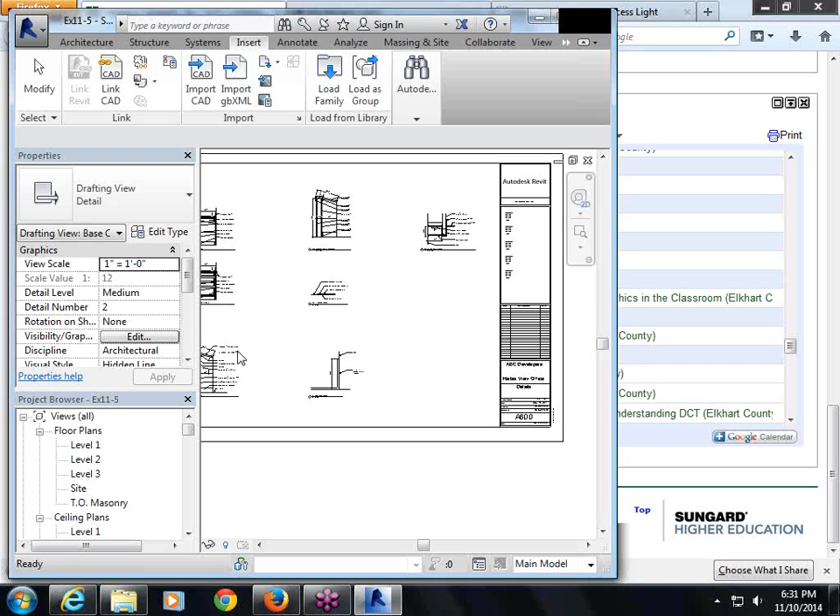From that point on, I'll just be live here, sitting here, and if people want to log in - you're still recorded as absent if you're not here. There's some of you that can't afford an absence at this point; you can't have more than 3 in a semester. So I'll just be here live, and I can hopefully go to a meeting with you, and I want to check each of your projects and see where you're at and if you need help with anything.

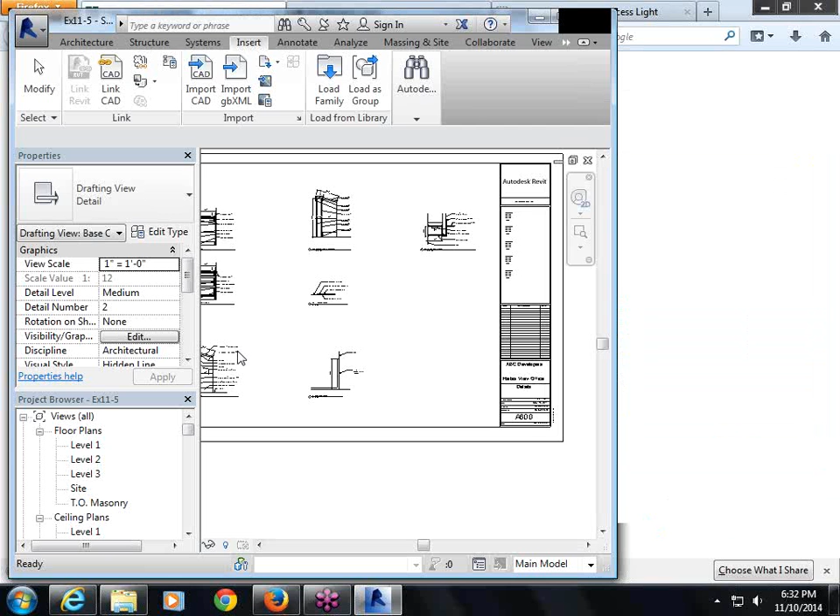So it'll be kind of an open lab time over GoToMeeting, and that'll be November 24th. I'm actually just going to be home that night, and I'll do it from home and be available. But if that's a night where you're going to be gone all week for Thanksgiving and you don't already have 3 misses, you can go ahead and miss that night if you'd like, because I'm not really going to go over anything. So that's the week of November 24th.

Then there are 2 additional weeks after that, December 1st and December 8th. On those weeks, I'm also just going to have an open time where we can go over some things, or you'll be showing me where you are in your project. Some of you might already be done at that point, and that'd be fine, but you'd still need to check in that night, and if you're already done, you just wouldn't have to stay in class the whole time.

Then on 12/15, that's our last class, and we'll be showing all of our projects here. I'm trying to think how to do that online. I'll just give you guys control. Maybe I'll have it where both 12/8 and 12/15 we present our final projects.

You guys can just go through on GoToMeeting and go through each drawing sheet and each of your views and walk through your building. Now I also understand that a lot of you are in the lighting and building class in Cheryl's class, and she's given you the project of this actual project here, that if you wanted to make the lighting more efficient, you can do that. So that might help separate you from all these projects being identical. You can maybe add some fun lighting to your project that'll cover both hers and mine.

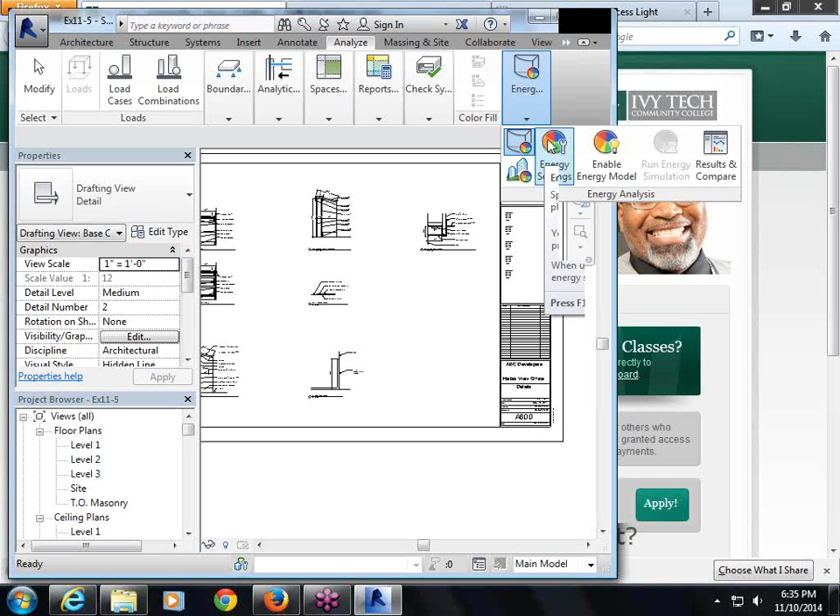Under systems you can add plumbing, electrical, and duct work, but for this class you wouldn't necessarily have to do that. If you picked up or opened a sample project in Revit that already has those items, you can go in and do an energy analysis of that building. It's kind of neat to figure out how to do that from an existing project that already has mechanicals, electrical, furnace, and all that in there—fun to see where you are energy-wise when you create a building. Since we don't have the mechanicals in your project, you won't be able to do that, but it'd be fun to learn how.

Are there any other questions you guys have? Yeah, I have a question.

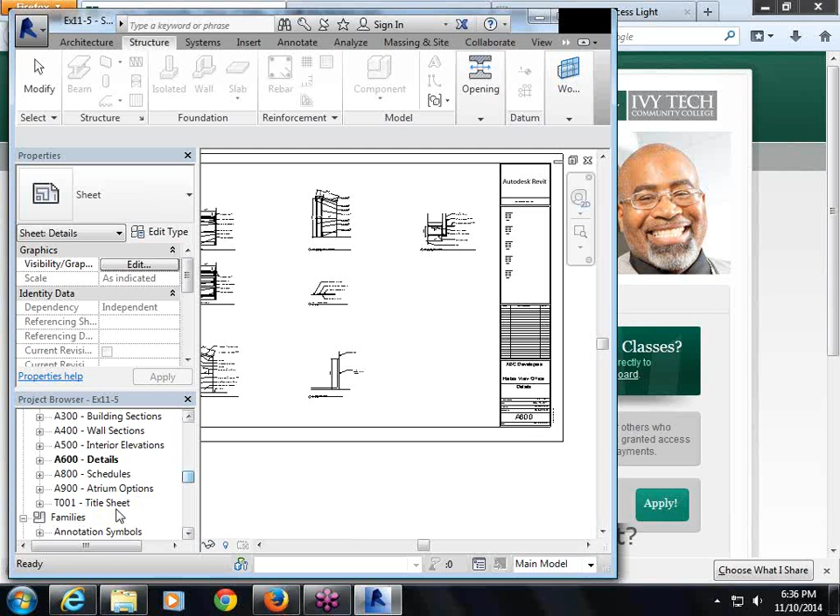I'm working on these two different views, the atrium view and the curtain wall option. It's really a challenge to get these two small enough to fit on one page, and when they end up smaller, they're not on the page at all, and I can't scooch them in there. Does yours look similar to this?

It's not colored. You can go into that view, activate the view, and then select realistic.

And you're saying it doesn't fit on your sheet? When I scale it down, the actual building is off the sheet, and I can't just drag it up there. Well, I just figured it out—I got it. I think you have to get it active and deactivated, and it's got to be in the right mode to do that.

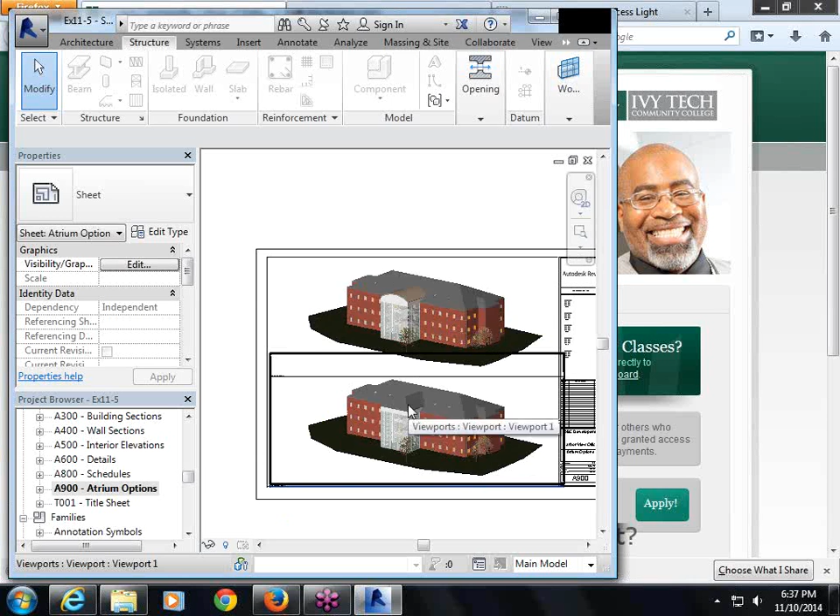You can change the scale if you need to through that. The realistic setting was down under the box—you select realistic, or there's another one, maybe consistent colors, which is what it was on, and I chose realistic.

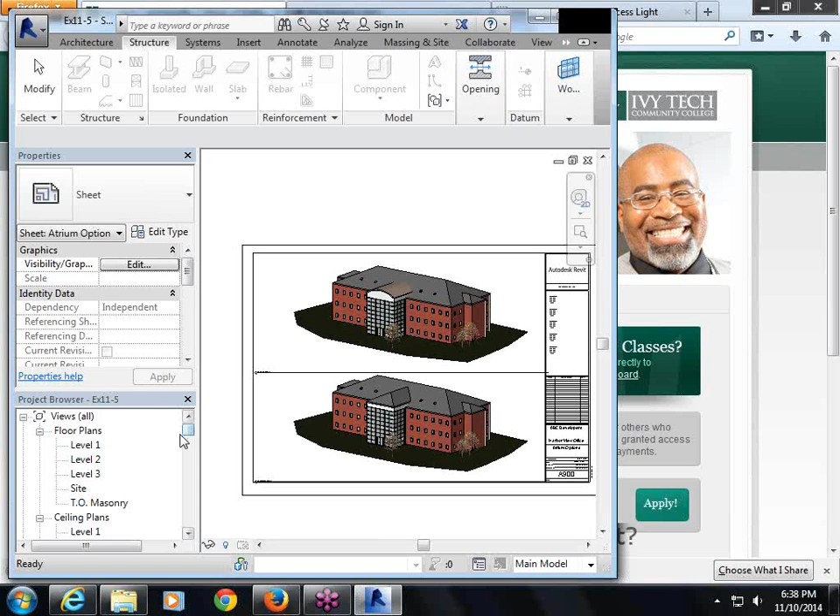Also, take these few weeks to take your time and do really nice renderings. It's going to take about an hour to render each one to a really nice view, and those are things you'll want in your portfolio to wow your client or potential employer. That way you don't have to redo it while you're in portfolio class—you'll already be working on a lot of different stuff and quizzes in that class, so it's nice not to have to take time to redo stuff. Go ahead and do it now while you have the ability.

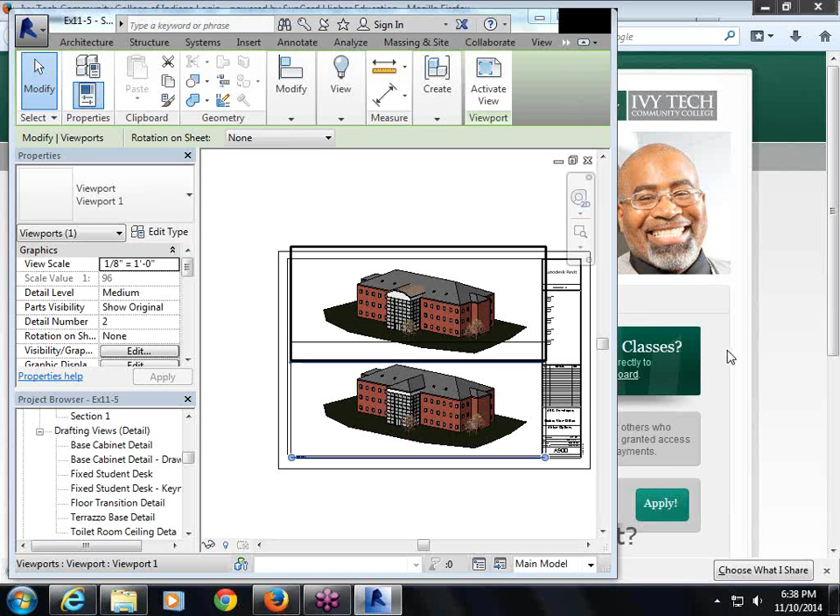Sheets are a lot harder to do in Chief Architect, but I've figured them out pretty well now. The only hard thing is that if you want the same floor plan shown twice, but in one you want the ceiling shown and the other dimensions, you have to turn them on and off each time. I think there's a way to save it both ways, but that's the biggest issue I come across.

Also, making schedules is easier on here. Making schedules are easier on here, yeah. They are.